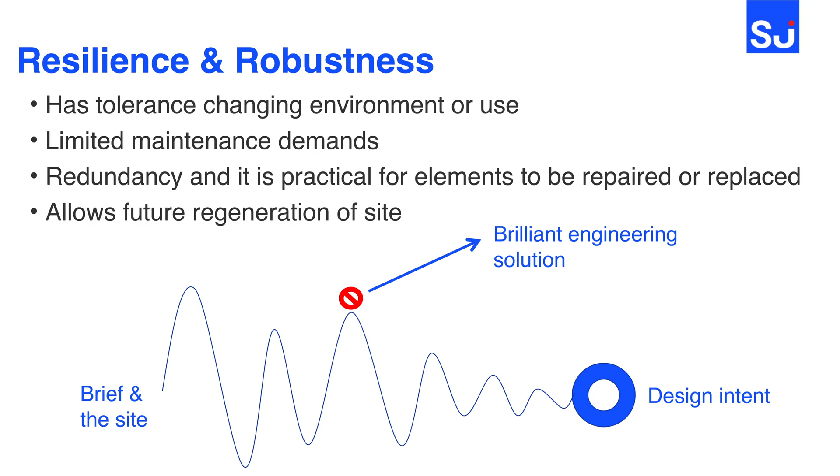And we've got to be careful. We love, as engineers, a linear design process — we start at the beginning, we finish at the end. But sometimes if you get stuck with a technical issue and it's taking you away from the design intent, it's better to start again, but don't compromise the design intent.

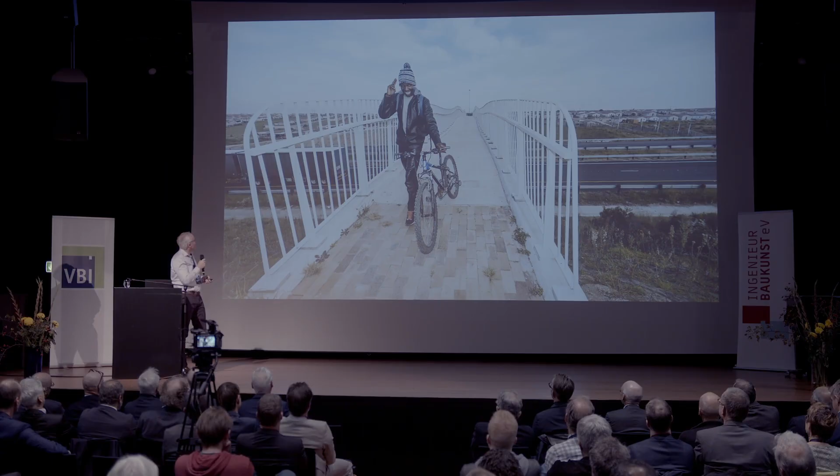But again, these handrails are very simple. You see they're not continuous, they're just modules, and they're placed there. So it's, again, relatively easy if you have to get in there and replace one. And we try and keep the upstands as low as possible so that dirt doesn't collect on the decks, it just gets blown off.

Our other big problem in South Africa is theft. We have a lot of theft of handrails, and even cables. So we try to come up with ways of mitigating that.

And we needed a suspension bridge here. There's some overhead power cables nearby. So in this instance, we've just used conventional cable-stayed monostrands inside a steel pipe that's then grouted up there afterwards. The anchorages are the steel assemblies at the top of the pylons, so we can get in there and inspect them. And again, it's a self-anchored structure to reduce the size of the abutments.

And we've been very judicious, robust in the design of the hangers. I think what you could say is, well, how do you replace that main cable? That's a fair question. The answer is you would have to prop the bridge to replace it, but the clearance is 5-6 meters, so you could do it. But it's a question that comes up, I think, for many people designing suspension bridges.

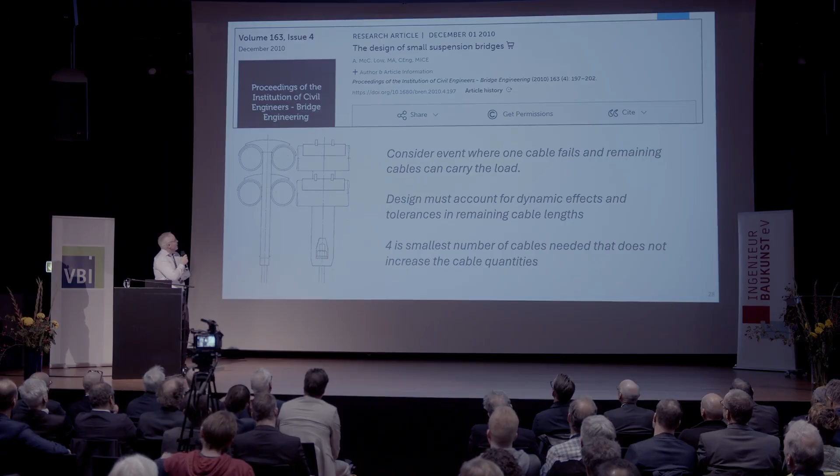This is a bridge that Knight Architects and Arups developed a concept for. There's a very nice paper written by Angus Low about how you can build in redundancy into a small suspension bridge.

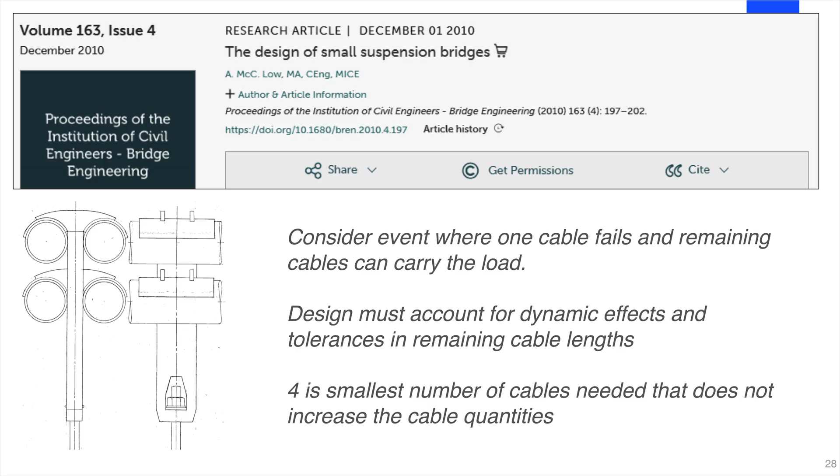You can consider the event where one cable fails and the other cables carry the load. It's a very detailed paper. It goes into how you basically consider the dynamic effects and the tolerances in the remaining cable lengths. And the magic number is 4, if you want to not increase the overall cable quantities. So I would really recommend that paper if you get a chance to read it.

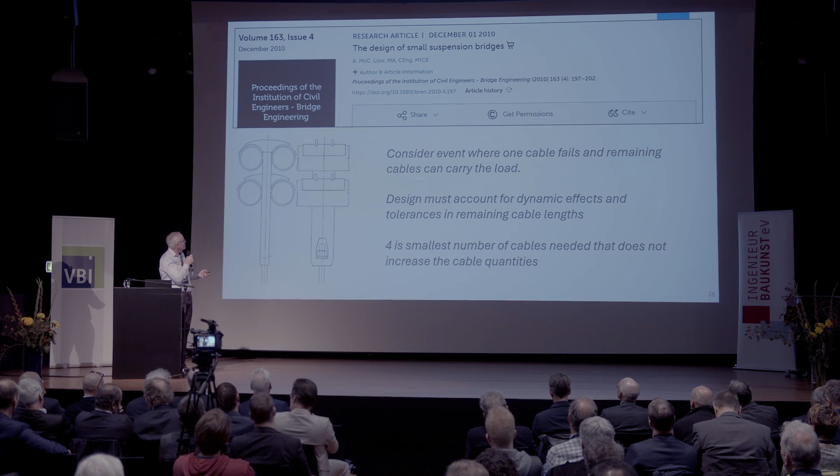And finally, I'm going to talk about a project where we're lucky enough to be building a cable-stayed bridge on the Wild Coast in South Africa, a beautiful venue, across a gorge which is basically untouched.

It's very difficult to get in and out of the gorge, and the vegetation there is incredible. The client's also building a little footbridge across this side gorge to give a viewing point for the main bridge. What was evident to the guys designing it was we obviously have to build it without impacting the gorge. But the question was also, how do you unbuild it if you want to regenerate the site? And I think in today's world, regeneration is important.

Sustainability is not enough. We have to think about how our structures play a part in a regenerative future. Can we take them apart? Can we disassemble them? This is the main bridge, a 580 span cable-stayed structure.

The obvious response was a very slim, slender bridge. The big challenge for us was it had to enable disabled access, so the gradient of the bridge was a challenge using a catenary. We've tried to shorten the span a little bit.

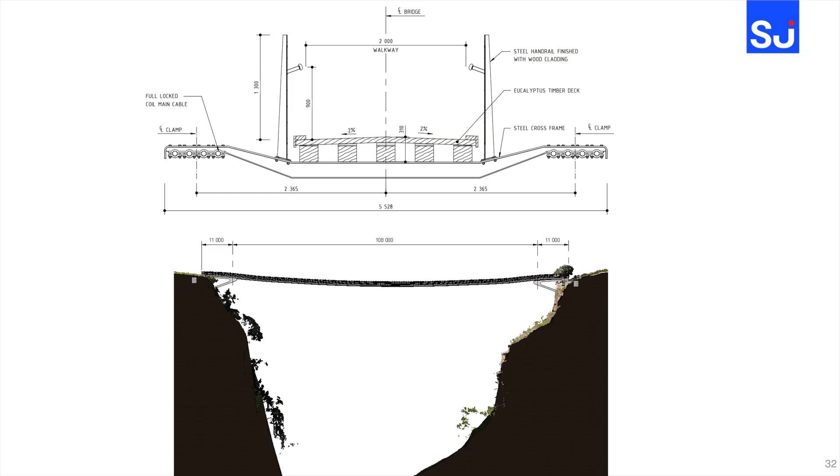But the main idea that we had was actually to use timber.

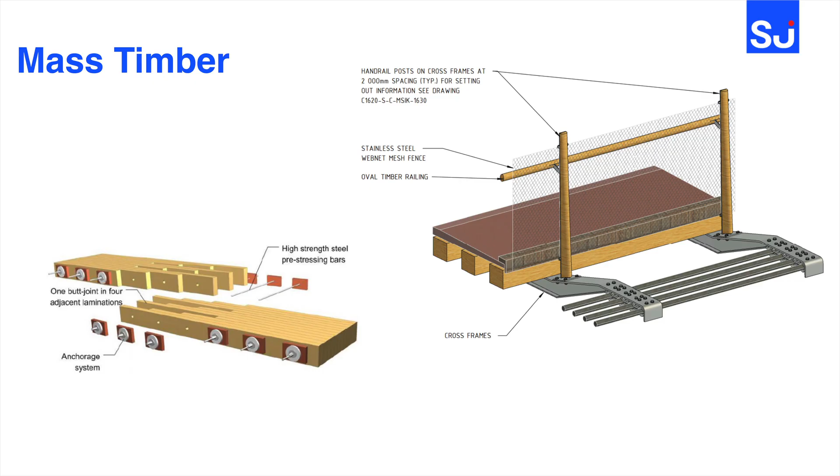The main idea was to use timber on the deck, and the reason for that was it's so easy to assemble and potentially disassemble. It can be bolted together, it can be spliced. We spent quite a bit of time trying to see whether we could use this timber in the structural design. In the end, we've used it as a complementary part of the stress ribbon, so that under live load, the timber beams contribute as part of the stress ribbon, and it actually reduces the deflection of the deck quite significantly.

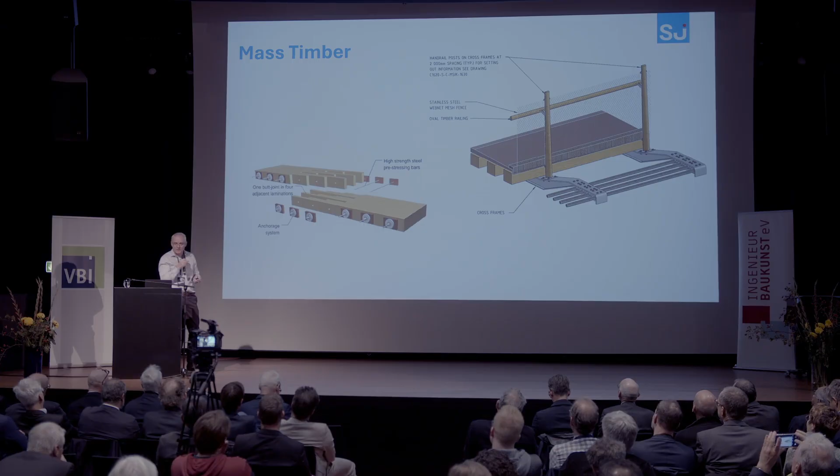So this is the bridge that doesn't keep me up at night. And I think for me, it reinforced the importance of robustness and resilience in designing structures, and how that actually changes your perspective on design itself. But there's creative opportunity in it as well. It's just another variable that we have to consider. But with that, it's just part of life's rich tapestry.

We create something that's maybe a little bit different, and I think you can still, as designers, create something with a high urban design value, aesthetic value, by considering robustness and resilience. Thank you.